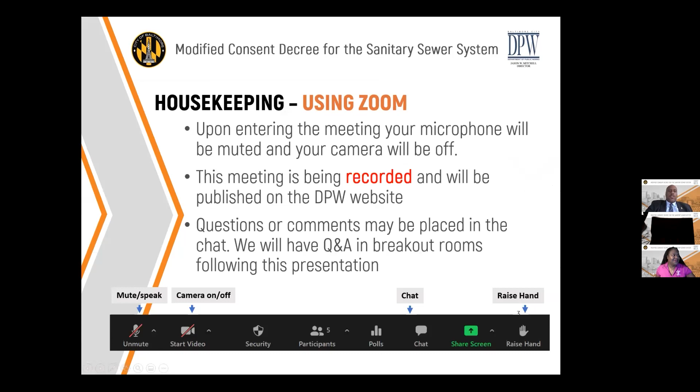Thank you so much, Odessa. As mentioned, I'm Jason Mitchell, the director of the Baltimore City Department of Public Works, and I'm excited to welcome everyone to the Baltimore City DPW Modified Consent Decree Public Information Session. We are grateful you can join us this evening.

Baltimore City DPW is committed to protecting our environment and the health and vitality of our waterways that serve our communities. And we have remained committed to that mission throughout this pandemic and all the challenges it has presented the department. Water and wastewater are 24/7, 365 days a year jobs. I'm sure everyone can imagine the havoc a highly contagious virus can wreak on that type of operation. But I'm happy to inform you, we have not only persevered through the pandemic, we have also progressed.

This is my first annual Modified Consent Decree. I'm just joining DPW about 7 months ago. Beginning on day one of my tenure as director, it was a top priority for me to ensure that DPW continues to meet and exceed all aspects of the consent decree.

Tonight, you are going to hear more about the Modified Consent Decree, commonly referred to as MCD. So if you hear MCD, remember Modified Consent Decree, and why it's so important to Baltimore City and all its residents.

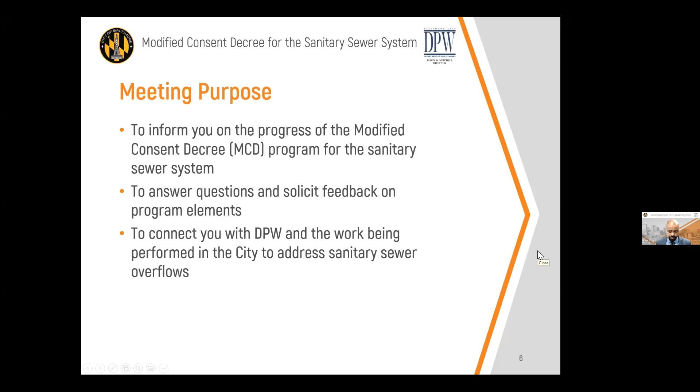As way of context, consent decree is a legal instrument or court order that resolves a dispute between parties and facilitates for something to be done. In the case of Baltimore City, that something was the rehabilitation of our sanitary sewer collection system so that we could mitigate the sanitary sewer overflows, or SSOs, that were prevalent.

So the original consent decree was signed in September of 2002. The United States Environmental Protection Agency, the Department of Justice, as well as the Maryland Department of Environment entered into that agreement with the city of Baltimore.

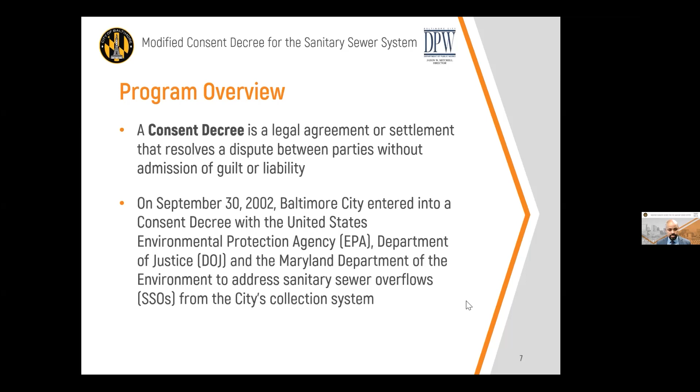From that point on, the city engaged in a very robust program to assess the condition of our collection system, to develop projects to rehabilitate the collection system, and continued on for approximately a decade, with the original deadline being 2016. As we were approaching that 2016 deadline, it became apparent that we may not be able to accomplish everything within the consent decree by that timeframe.

Due to a host of factors, the most prominent would be the discovery of a hydraulic restriction at our Back River wastewater treatment plant. As you can see from this image, that blue watermark represents that treatment plant. That hydraulic restriction created a 10-mile long backwater effect into the city that contributed significantly to SSOs.

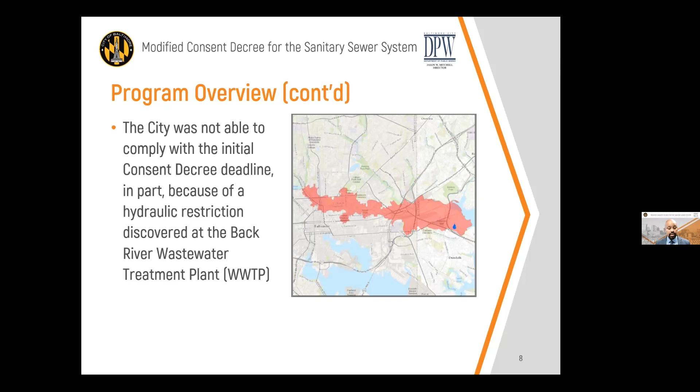From that point on, the city engaged in a series of negotiations with the regulators to arrive at an extension of the deadline. What that led to was the modification of the original consent decree. In 2017, it was finally inked, and we entered into a modified consent decree with an adaptive management approach: one phase to be completed by January 1st, 2021, a period of evaluation and assessment about the efficacy of the projects conducted in that phase, and then a second phase that would complete at the end of 2030.

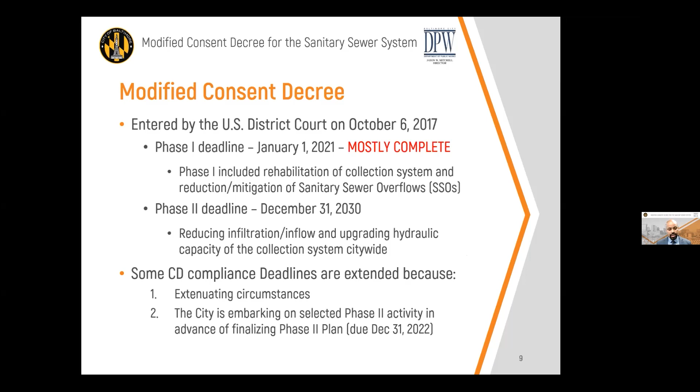At this stage, we are mostly complete with phase one. There are a few projects still in process, and there are various extenuating circumstances as to why. But I do want to point out that one factor is that the city proactively looked at scope of work originally slated for phase two and elected to bring some of that scope into phase one, to do it earlier and save time and money. As we did that, it added a bit to the timeline for our phase one execution.

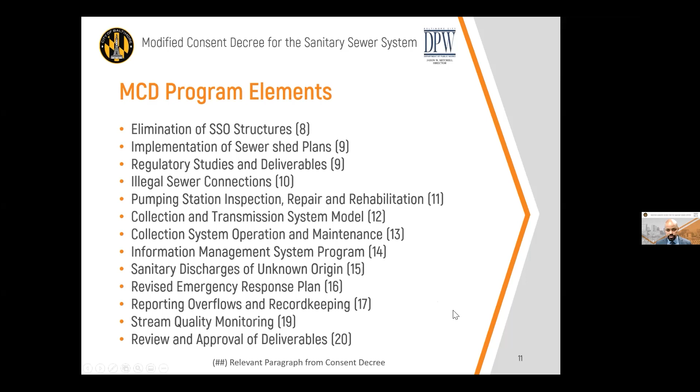So the very first paragraph to tackle is paragraph number 8, which is focused on SSO structures. SSO structures were features of the sanitary sewer collection system included back when Baltimore was growing and modernizing and developing. Essentially they act as fail-safes or pressure relief valves that allow the discharge of untreated sewage into waterways in the event that a particular pipe was over capacity, to prevent backups further upstream. It may have been fine back then, obviously created issues in modern day, and we have implemented paragraph 8 to eliminate these structures.

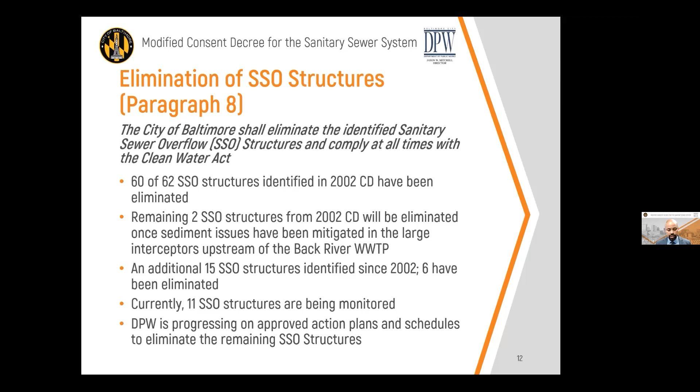Since the beginning of 2002, 62 were identified, 60 were eliminated. 2 are key, and they will pop up at different points of this presentation. They are identified numerically, number 67 and number 72. These 2 of the original structures still remain, and they will be eliminated once we execute a project to clean out accumulated debris and sediment in one of our major interceptors. All in all, we have 11 SSO structures that are still being monitored and will be eliminated soon.

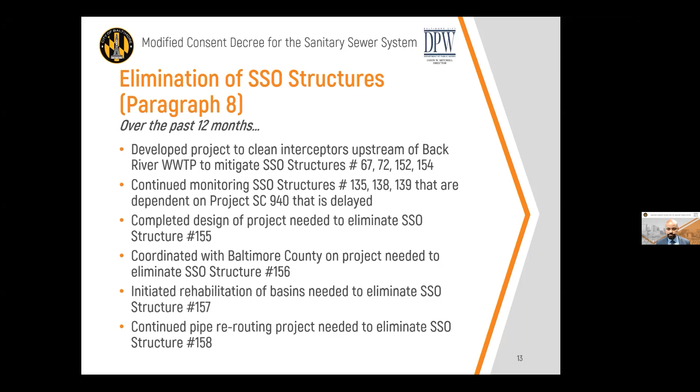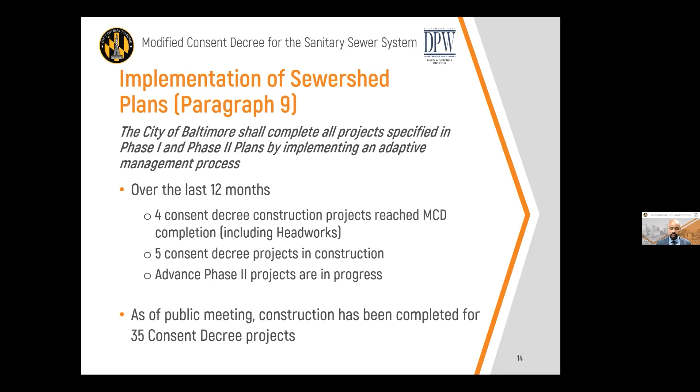Paragraph 9 is essentially all the design and construction projects over the past 12 months. 4 of our construction projects have reached their milestones, and that includes the Headworks project, which we'll talk about shortly. 5 consent decree projects remain in construction phase. And again, we are looking at some phase 2 projects and already starting the planning, strategizing, and implementation of design for these projects. So as of today, 35 altogether construction projects have been completed within the MCD.

The types of projects we implement include cured in place pipe, or CIPP, which is essentially a trenchless approach to rehabilitating pipes. It minimizes the disruption because we do not have to excavate, so many of our projects are CIPP projects. We also have pipe point repairs where we do have to excavate, short sections of pipe are taken out and replaced, rehabilitations of manholes, as well as the rehabilitation or replacement of sanitary house connections that lead from the main to the house.

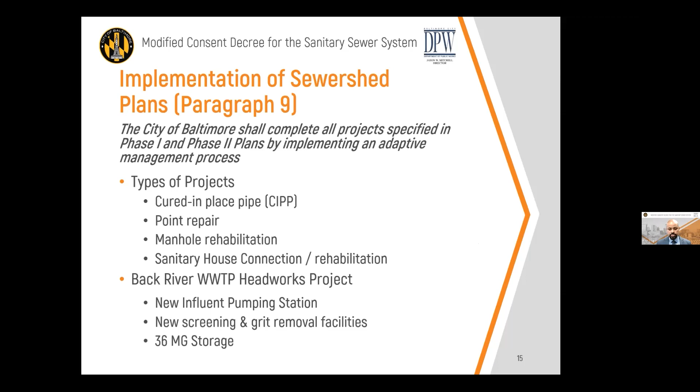The Back River Headworks project is a project on its own, again very unique, the largest project the city has ever executed, at $430 million. As you can see, various new infrastructure at the Back River wastewater treatment plant.

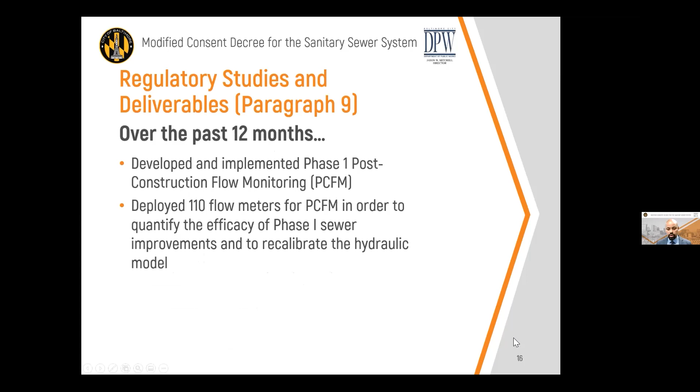Another part of paragraph 9 is related to the various regulatory studies and deliverables. I mentioned the assessment phase between phase 1 and phase 2 that we're calling the post-construction flow monitoring period, or PCFM. We have developed and implemented that PCFM, deploying 110 flow meters throughout the sanitary sewer system to give us data on the flow underground and to recalibrate the hydraulic model.

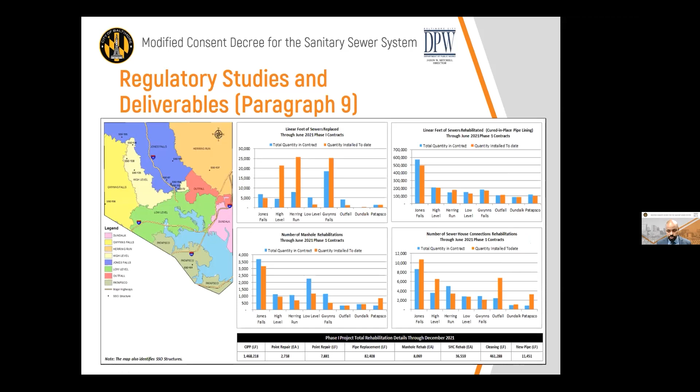This image is an excerpt from one of our quarterly reports. Every quarter we submit and provide an update on the progress and status of the consent decree along various metrics, such as the linear footage of sewers replaced, the linear footage rehabilitated through CIPP, the number of manholes rehabbed, and the number of sanitary sewer house connections rehabbed.

Again, the Back River Headworks project, $430 million. To date, based on the completion of that project, we have reduced sanitary sewer overflows by volume by 69%. Once we complete the cleaning of the interceptor, we will achieve additional reductions in SSO.

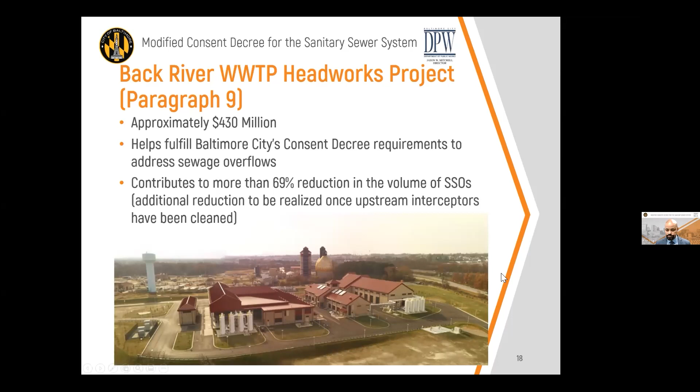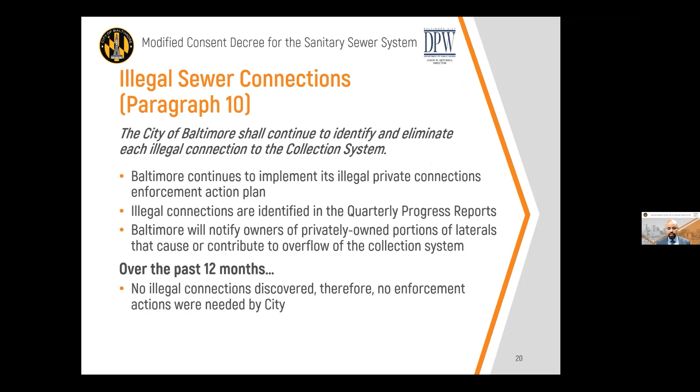Illegal sewer connections is paragraph 10. Over the past 12 months, we have not identified any illegal connections, so no enforcement actions were needed by the city.

Paragraph 11 is in reference to pumping stations, our sanitary sewer pumping stations. No overflows and no near misses were identified during these past 12 months.

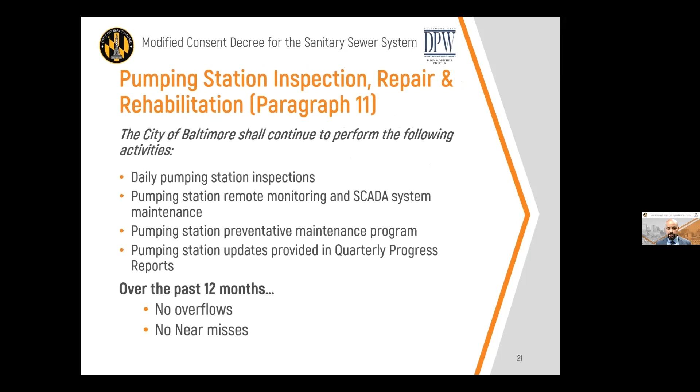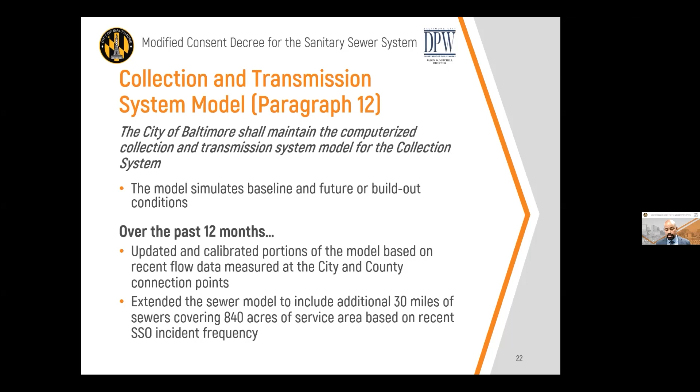Paragraph 12 is in reference to the collection and transmission system model, our hydraulic model. This model simulates the condition of the system now, the flow as it is now, our baseline, as well as projects and simulates future build out. Over the past 12 months, we updated and calibrated various portions of the model. We also extended the sewer model, which by mandate covers pipes 10 inches and larger. We identified areas in the system with recurring issues and extended the model to include and simulate these areas, even though they are less than the mandated 10 inches.

This image shows you the extent of that hydraulic model. In red, you'll see all the main interceptors and pipes that eventually convey flow to the Back River Wastewater Treatment Plant. In blue, the same network of pipes that convey flow to the Patapsco Wastewater Treatment Plant. Lower right, you'll see an excerpt from an output of the model that shows the potential flow in the pipe as it's simulated. It shows the potential for overflows from the system. That middle portion where the surface elevation line is above the ground level, shown in brown, indicates where we are likely to see overflows.

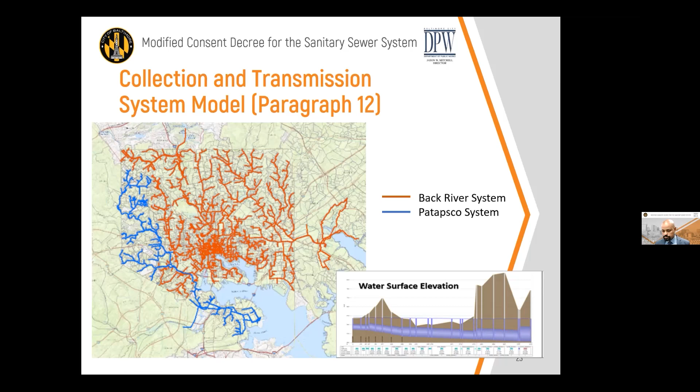Paragraph 13 refers to the collection system long-term operation and maintenance, or O&M. Over the past 12 months, we submitted 2 key deliverables that we are required to submit: the progress report and the annual update of the O&M plan. Both have been submitted and also uploaded to our website.

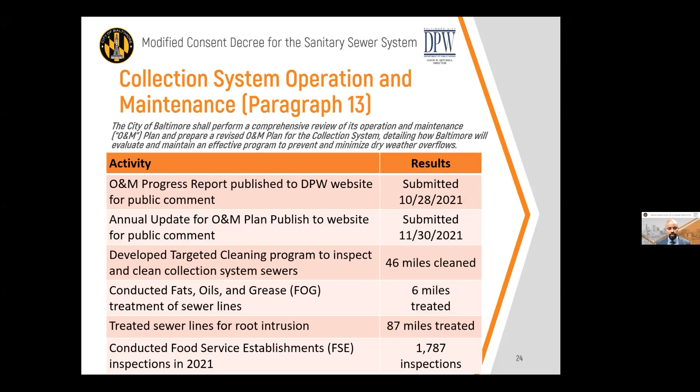During these past 12 months, we have a targeted cleaning program for our sanitary collection system, involving the inspection and cleaning of the collection system at various locations, and 46 miles were cleaned. We have a fats, oils, and grease program, or FOG, that's very critical to the O&M of our system; 6 miles were treated. Because various lines are susceptible to root intrusion, we also have a root control program, and 87 miles of pipe were treated for root intrusion. Finally, we have a robust program that inspects food service establishments to make sure they have done the appropriate level of pre-treatment before discharge.

Paragraph 14, the information management system. We have a GIS database that is expansive and inventories all the collection system assets. Over the past 12 months, we've expanded the use of the GIS database along with our computerized maintenance management system called Cityworks, that allows us to manage our work orders for regular O&M.

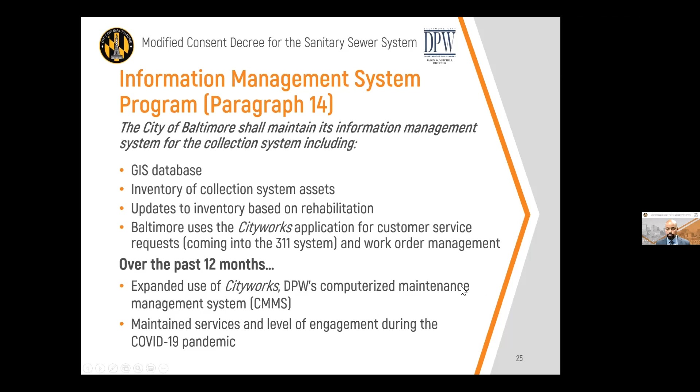Paragraph 15 is in reference to the sanitary discharges of unknown origin, or SDUOs. This program identifies discharges of sewage into the stormwater system and tracks the source of those SDUOs. Over the past 12 months, 16 SDUOs were identified or discovered. We have abated about 4 of them, there are a few outstanding, and there are also 5 that we are abating from previous years' discoveries.

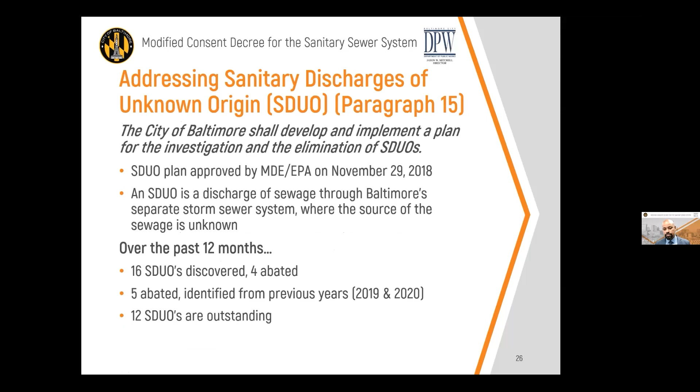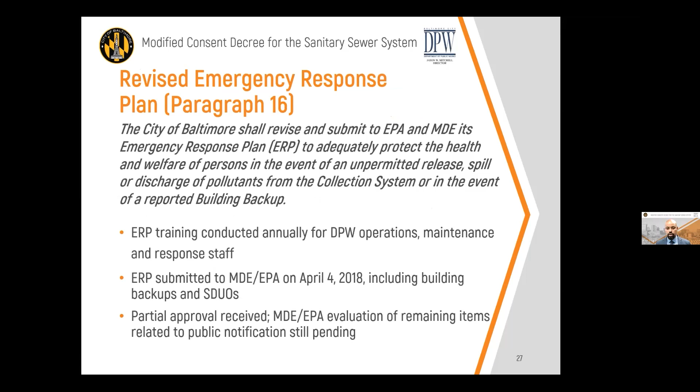Paragraph 16, the revised emergency response plan. This ERP is a critical part of our first responders' actions whenever there is an emergency with our sanitary sewer system. This ERP was submitted in 2018. To date, we have received partial approval from MDE and EPA, who are evaluating various components of it, and we hope to have full approval of the ERP in short order.

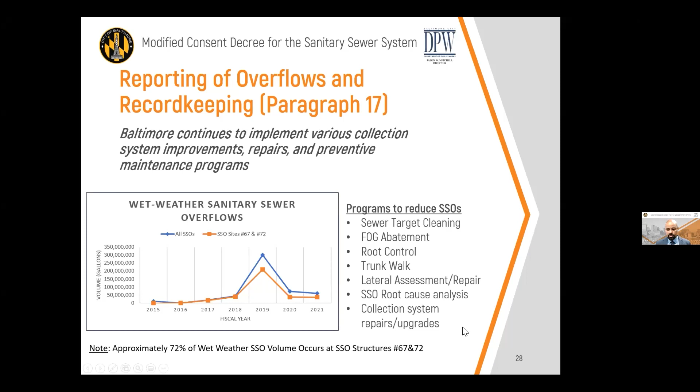Paragraph 19 is for stream quality monitoring. The city has a very expansive program for sampling and analysis throughout our waterways, both tidal and non-tidal. We sample and screen for ammonia that facilitates identifying the sources of potential pollutants into our streams. There's stream impact sampling that we conduct to assess for bacteria levels, metals, and other pollutants in the waterways.

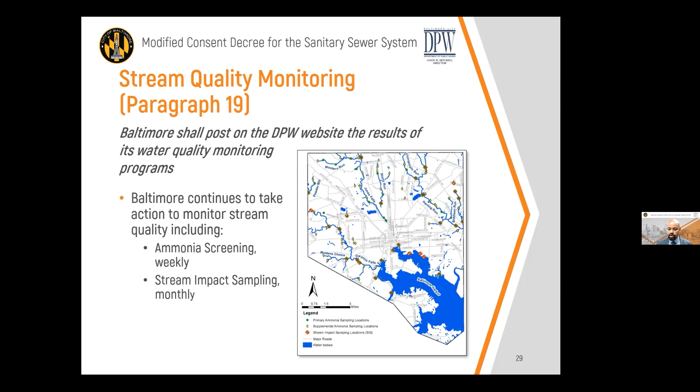The image on the right, it might be hard to see, but you can see the various locations where we have this sampling being conducted. The sampling and analysis requires a network of resources, including human resources, 12 scientists, and quite a few stations that are routinely sampled. So there are permanent stations.

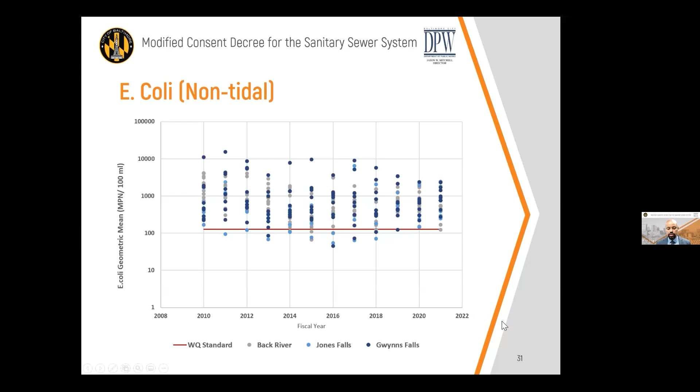But again, the execution of the MCD, all the sanitary sewer projects, will have a positive effect in reducing the E. coli level in non-tidal waters, and getting us below the water quality standard. And the same thing for Enterococcus in our tidal waters.

One of the exciting new programs that we have is the SOS program, or the Sewage On-Site Support Program, that provides direct assistance to residents that experience sewage backups.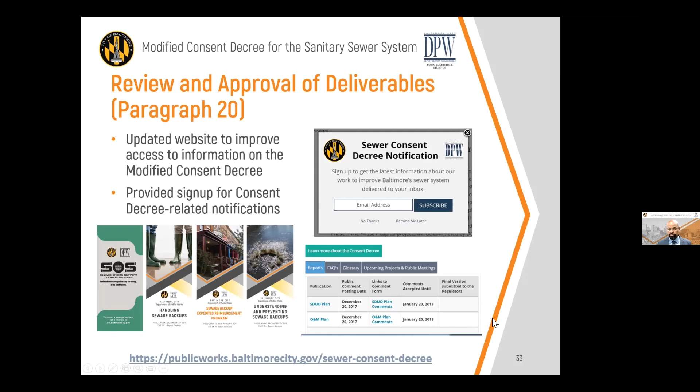So everything I've covered so far is mandated through the MCD. The Small Business Development Program is a program that's part of our overall MCD, but is not mandated. This is a very exciting program that is the brainchild of DPW.

We provide, over a course of 10 to 11 weeks every year in the fall, a training program for small businesses, particularly minority and women-owned businesses and entrepreneurs, so they can become contract ready to do work with the city of Baltimore, offering various classes on contracting, project management, and the like. Over the span of the running of the SBD program, we've graduated over 300 firms to work with the city.

So finally, in reviewing the accomplishments of the MCD, the main message we want to communicate is that we, as the city, are doing more to prevent SSOs. In doing that, we're evaluating on a regular, constant basis the performance of our work.